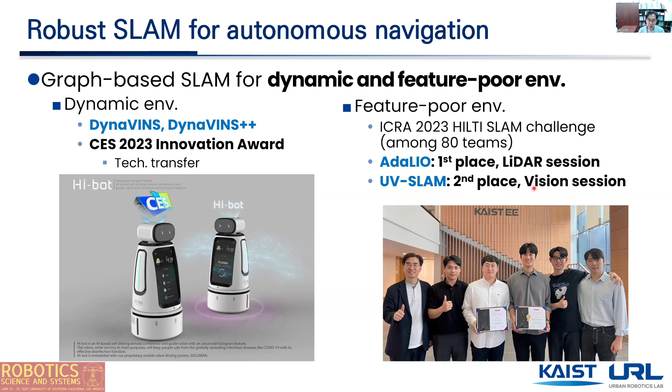In the dynamic environment, we can detect dynamic objects using deep learning and remove them in the feature set. But for untrained classes, we cannot deal with them properly. So we have proposed DynaVINS to deal with dynamic objects without using deep learning.

As you can see in this video, our algorithm can discriminate dynamic features from static features. Even when the truck is covering most of the scene, DynaVINS performs best compared to other SOTA algorithms like VINS-Fusion, ORB-SLAM3, and DynaSLAM.

For LiDAR-based SLAM, we have developed AdaLIO, which is the acronym for Adaptive LiDAR Inertial Odometry. SOTA algorithms like FasterLIO diverge in narrow spaces because the number of point data is decreased in that case. But our algorithm AdaLIO can adaptively maintain the number of point data in a voxel regardless of the area size.

So we have two novel approaches for that. First, AdaLIO employs an adaptive parameter strategy. After checking the degeneracy, we adaptively change the parameters to maintain a constant number of points in a voxel.

As a result, while FasterLIO diverges in narrow spaces, AdaLIO is very robust in localization performance. As you can see in this video, if we pass through narrow spaces like corridors or stairs, FasterLIO diverges while our algorithm maintains its course.

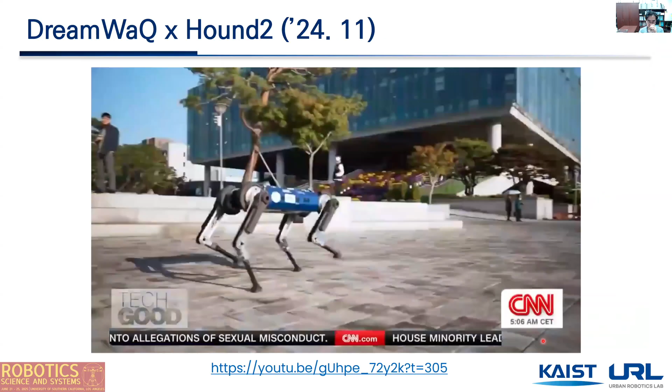DreamWaQ can be applied to larger platforms like Hound 2, which was developed at KAIST. We took the Hound out for a walk around campus to learn about another kind of technology being developed by KAIST's Urban Robotics Lab.

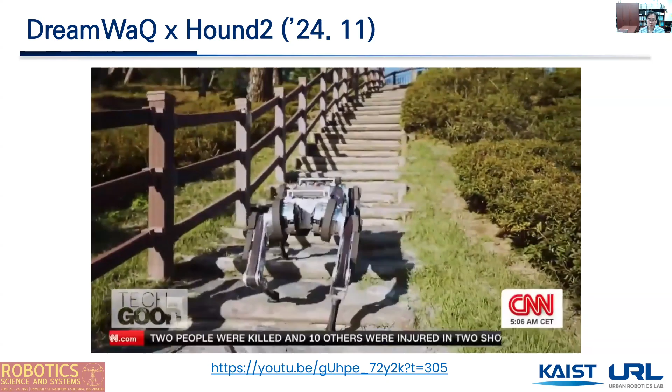The Hound has been programmed with new software called DreamWaQ. This enables blind locomotion, meaning the robot can navigate uneven terrain with no camera or LiDAR sensors to see where it's going. Like on the racetrack, it gets basic instructions like stop and go from a controller, but it has to feel out and adapt to the terrain for each step it takes.

This is the accumulation of knowledge and data taken from 4,000 virtual robots learning to walk at the same time. After 1 hour of training in the Isaac Gym simulator, the robot could successfully climb up the stairs. We were also very surprised by this rapid adaptability of DreamWaQ.

We also developed a fall recovery function called DreamRiser. By dropping the robots in various poses in discrete environments, we could successfully train the robot to stand up quickly after its fall.

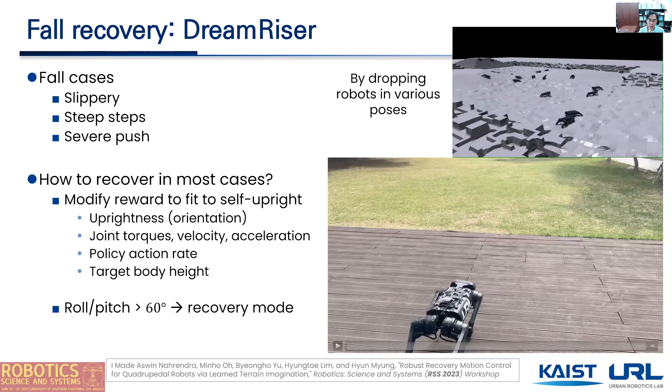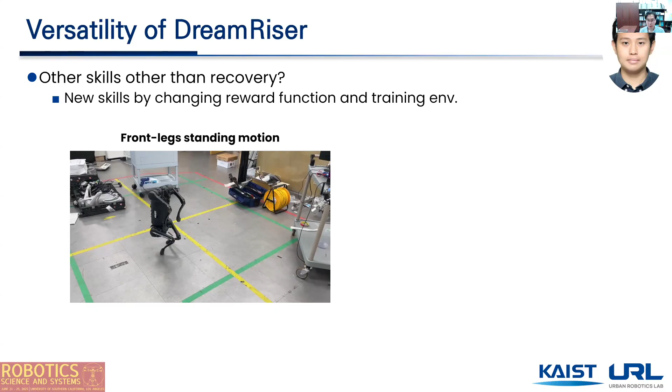Other skills are also possible. What if we change the pose tracking reward into a different body orientation reward? Interestingly, the robot can run a handstand motion, as shown here, and also the hind legs standing motion. Lastly, it shows retrying behavior when the robot fails to stand up, which is an emergent behavior.

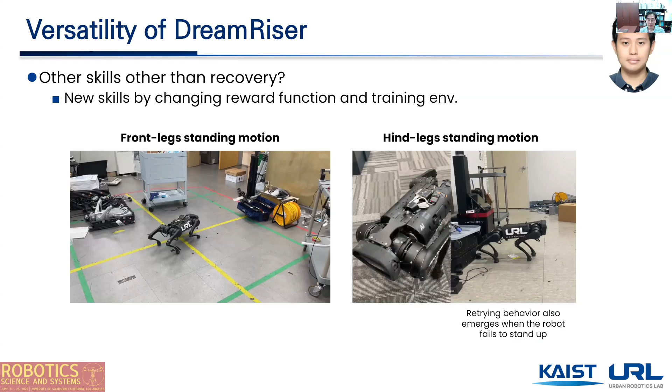With all our technologies, we participated in ICRA 23 QRC quadrupedal robot challenges, which was held in London, UK. There are 5 sections, A, B, C, D, E, with a total size of 10 by 20 meters.

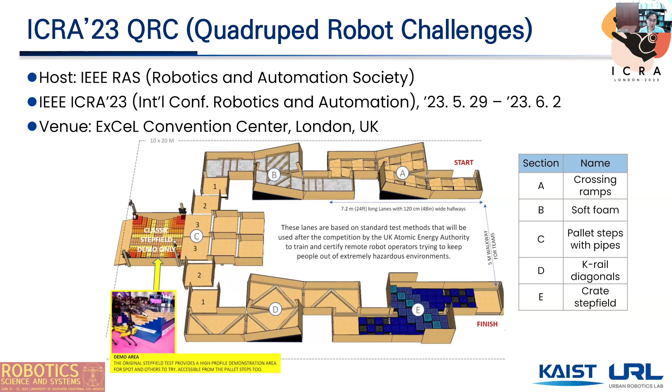All these sections actually mimic disaster situations, such as slanted concrete with dust after collapse, sand, mud, puddles, steps, and holes, which make it impossible for wheels and caterpillars to navigate these terrains.

In the easy setting, we can get 1 point using teleoperation, and 4 points using autonomous navigation. For harder settings, we can get double the points of the easy settings.

6 teams battled in the final, and we got first place. Only 2 teams, KAIST and IIT from Italy, performed autonomous navigation, while the other teams only performed teleoperation.

You can see some of the videos for the details of the QRC. Yeah, this shows the 5 sections.

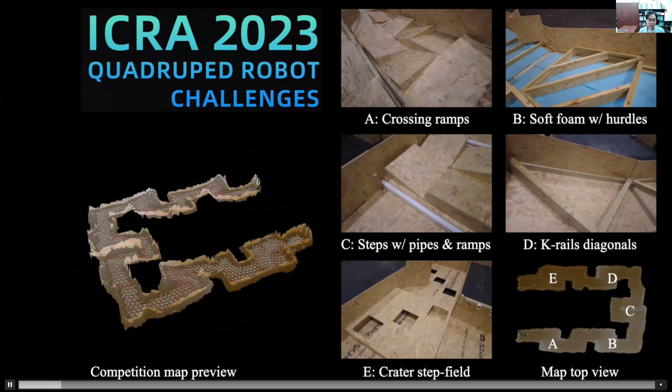We use 3D LiDAR and the camera for exteroceptive sensors, and joint and IMU for proprioceptive sensors. We have compared FastLIO with our algorithm LVIK, which is an extension of LIO that also incorporates kinematic data.

This shows the terrain mapping algorithm. We can get the height map as well as the risk maps, and using this risk graph, we can plan the paths.

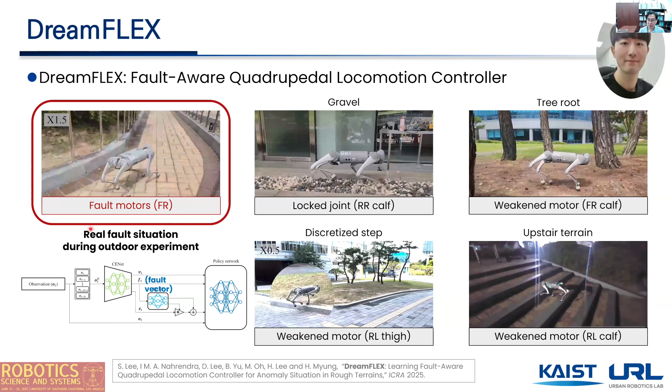We also have developed a fault-aware quadrupedal locomotion controller called DreamFLEX. In this video, the failure actually occurred in the right front leg during the walking experiment outdoors. Despite this, the controller was able to identify the failed joint in real time and adaptively change the gait pattern to successfully walk stably using the other three legs.

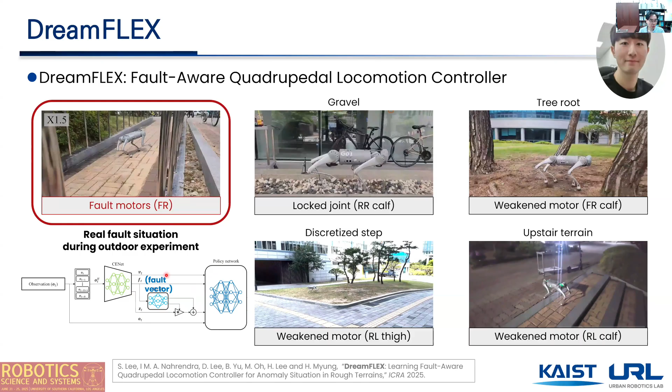This controller is a small modification from our DreamWaQ. We use the fault vector, and using this fault vector, we can estimate the fault joint.

Recently, we have developed DreamWaQ++, which is an extension of DreamWaQ. We use the exteroceptive scan dots for terrain reconstruction like this. This enables more agile and non-colliding locomotion. This shows the details of DreamWaQ++, which is more complicated than DreamWaQ, but also runs in real time.

The front robot is controlled by DreamWaQ++ and the other two robots are controlled by DreamWaQ. You can see that the front robot runs faster and does not collide with the steps, which was frequent in DreamWaQ. And also 15 centimeter stairs can be overcome, though the specification of the Unitree Go1 is 10 centimeter stairs.

And also the probing behavior is quite interesting. Though we have commanded the robot to go forward, it retreats and tries to see beyond the cliff to jump. And the last video shows that DreamWaQ++ controls the robot to be aligned with the slope, while DreamWaQ could not.

Our team recently made this portable mapper for easy reconstruction of 3D maps. If we install this portable mapper on legged robots, it turns them into autonomous legged robots. If you install the portable mapper on a wheeled robot, it turns into an autonomous ground vehicle.

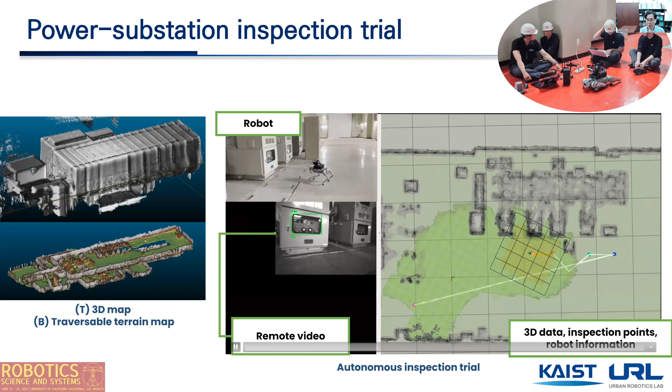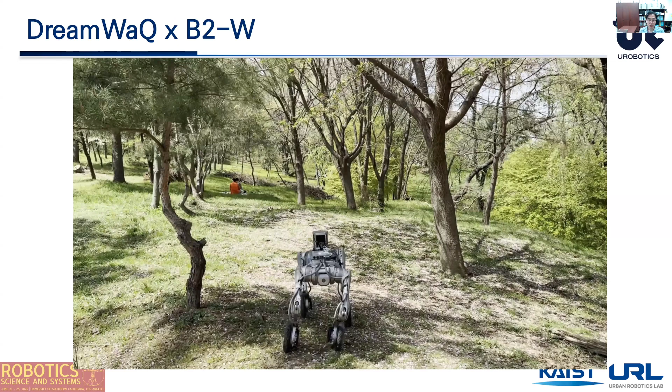B2-W, this is the wheel-legged robot, and this can also be trained by our DreamWaQ. We can command the robot to go forward, but the robot can determine when to use the legs or wheels autonomously. Yeah, like this. And also in the stair environment, it navigates using its legs on the stairs and wheels on the flat terrain. So this shows the generalization capability of our DreamWaQ controller.

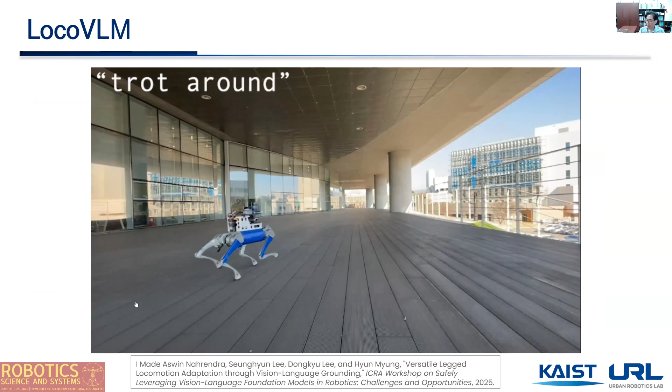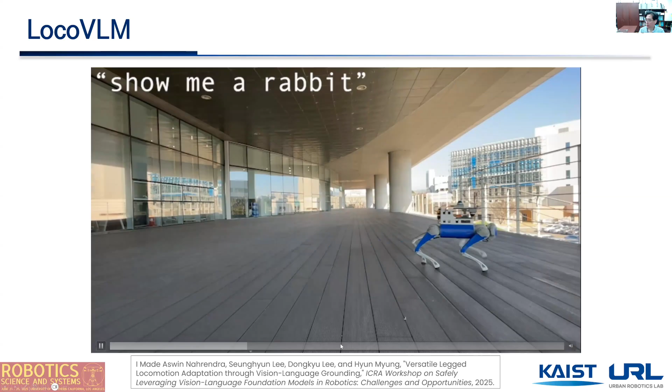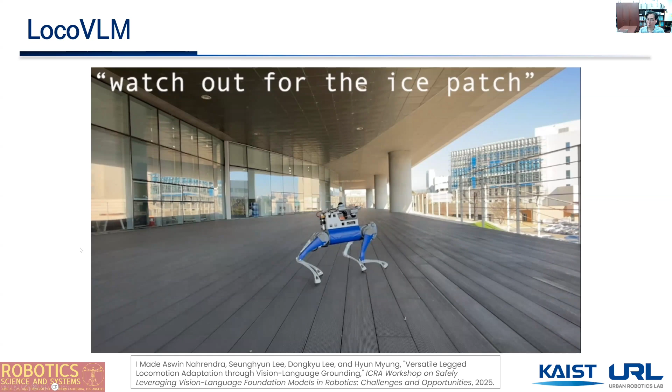So with a language command or image perception, we can show autonomously generated locomotion like this. Trotting around, or if the robot perceives the baby is sleeping, then it shows very slow locomotion like this. Show me a rabbit. Frog. Dance for me. So we have not programmed this kind of behavior. This behavior is generated autonomously by using LLMs and VLMs.